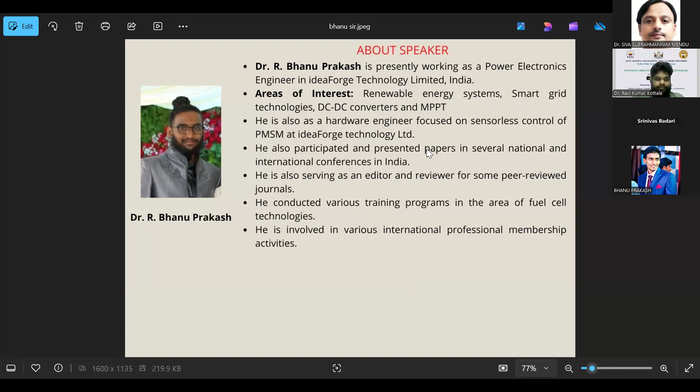Am I audible? Yes, sir, you're audible. Your video was not enabled. Turn it off because of internet issues. Okay, okay. So Dr. Siva Subrahmanyam and Dr. Ravi Kumar, thanks a lot for your brief introduction about me.

Thanks for giving me this opportunity to talk on smart grid technologies. So I'll be presenting now. I've recently changed my company, so I'm a solar PV design engineer in NewSpace Research and Technologies for aviation applications.

Let's begin with the session, Next Generation Smart Grid Technologies. The actual content we are looking at is an introduction to smart grid technologies: what is this smart grid, and what are the technologies under it, and the core technologies in the next generation that we are seeking. What are the challenges and barriers, innovations, and emerging trends coming in smart grid? What are the implementation strategies and case studies? Finally, what are the upcoming trends we still have to look after in smart grid?

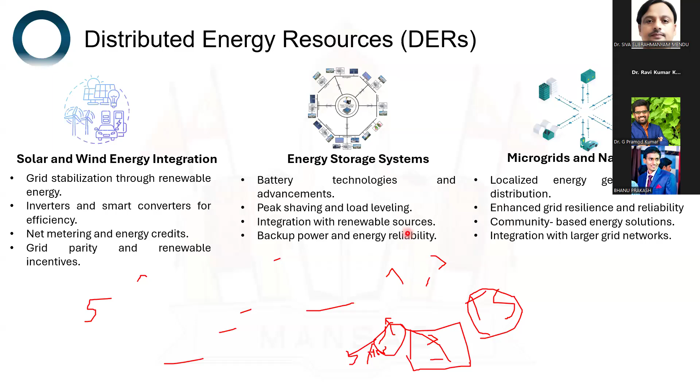An example that we use in the current industry, we generally drive the electric vehicle with the battery. But to enhance the energy production, to have a higher energy density, we're going to incorporate a solar panel system. So the load consumes 1 kilowatt, and the panel is going to give only 200 watt. It's just an example, a rough value.

Let us say I have my load like motors or turbines, whatever it is. My system is of 1 kilowatt, but my solar panel is able to generate only 200 watt. So the other power, like 800 watts remaining, is being given by the battery energy storage system. It can be battery, it can be fuel cell also. With the help of both, we can inject power to meet the actual load. These energy storage systems will help renewable energy sources like solar or wind to integrate into the system. So energy storage systems is always a key aspect here.

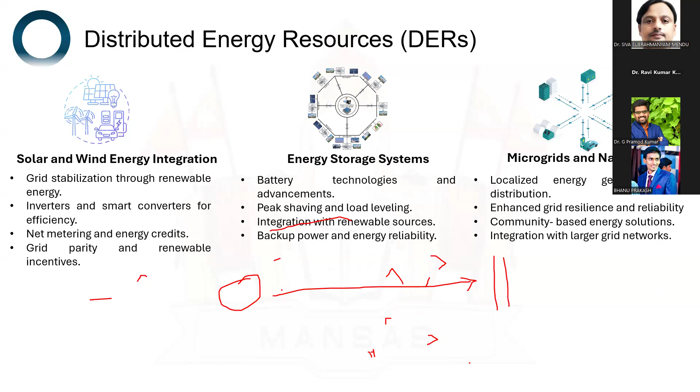Let me explain this way. You have a rural area and the transmission grid is very far, consider the gap is around 100 kilometers. This rural area may have very little power need, like 1 kilowatt, assuming they only need lights. Even for this 1 kilowatt, transmitting from here to there, the government will take time to release funds, so that is more time consuming. Before that happens, they release tenders so local entrepreneurs can come and electrify this village.

They use solar panels and wind systems so the village gets electrified with basic necessities like tube lights and fans. Slowly the government increases its transmission lines and connects to the localized system, giving extra localized power, but it's still a lossy network. Without localized energy, it's completely lossy to transmit over 100 kilometers to deliver just 1 kilowatt. But when localized power is there, if the load demand is less, it can still reduce transmission losses.

So microgrids and nanogrids are still a key aspect. Nanogrids can be considered as 1 to 10 kilowatt, and microgrids as more than that, up to around 50 kilowatt. This enables localized energy generation and distribution, and enhances grid resilience and reliability. Even when you have two power sources, if one is cut off, you can have localized power generation, and community-based energy solutions happen. These small grid networks like microgrids or nanogrids can also be integrated with the actual large power grid network.

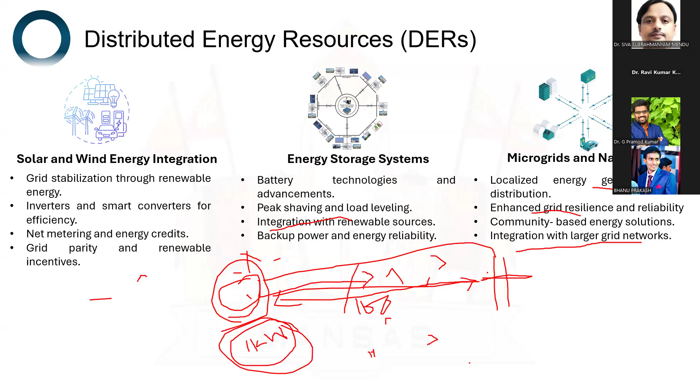The next topic is smart sensors and IoT devices. Consider real-time grid monitoring as in the previous version, it does continuous surveillance of grid parameters. At the same time, voltage and frequency monitoring are key aspects for proper synchronization, along with automated incident reporting and data-driven decision making.

What other benefits do smart sensors and IoT devices provide? Fault detection and isolation allow rapid identification of faults, along with automated isolation and rerouting. So you can isolate the fault and reroute, reducing outage durations. By easily detecting the fault, you can isolate that specific aspect, and reducing outage obviously increases reliability.

Next is predictive maintenance, where you forecast issues through condition-based maintenance schedules, based on specific conditions like power requirement and load demand. There's a specific restriction on power, and based on that condition, there's a maintenance schedule for that specific area. This is possible with smart sensors and IoT devices, along with downtime reduction through advanced analytics.

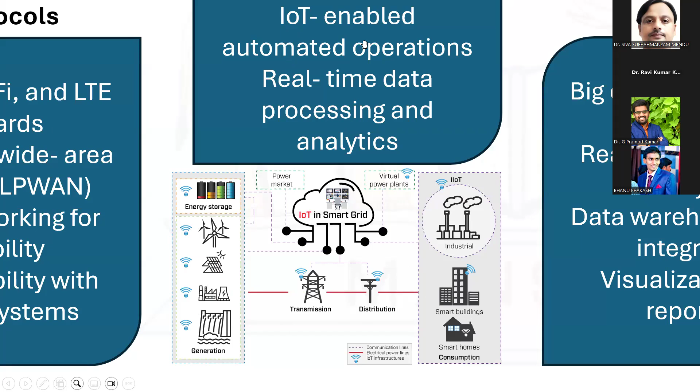If you see here, the IoT in smart grid - let us see on a broad perspective instead of a small house. So you have energy storage systems, wind, solar, and power plant - all these things, if integrated with the Internet of Things, and there exist some virtual power plants that we'll talk about later. So when all these things are being communicated, normally what happens is the power generated through the transmission line will be distributed to the buildings and industry. When it is IoT enabled, what happens to it?

It is seamless connectivity. You can simply connect the grid components, and by using edge and cloud computing architectures, you can increase the smartness of the grid for reliability and efficient transmissions.

When you have such large systems, you need communication systems that handle data management and analysis. So big data platforms are obviously required when we have hundreds, thousands, and lakhs of consumers and producers. Real time stream analytics, data warehousing and integration, visualization and reporting are all very important in data management.

When you have all this, it is important to have cybersecurity measures. Threat detection and response mechanisms is one of the key areas. You need security architecture and design principles to ensure secured transmission and communication, along with incident management and recovery, and collaboration with cybersecurity organizations.

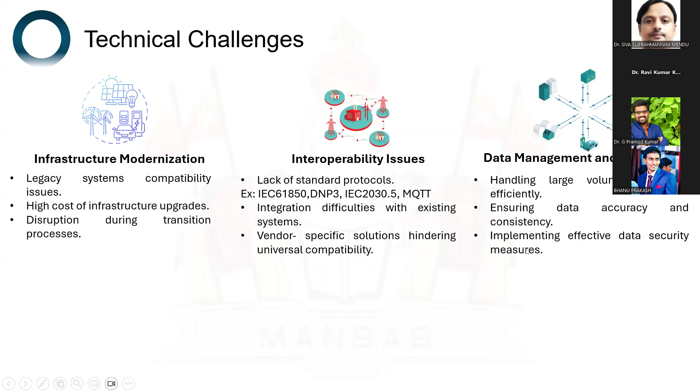Again, data management and processing means handling large volumes of data efficiently. You need data management to ensure data accuracy and consistency, whatever data we have, to make the grid smarter. And implementing effective data security measures, to ensure better security of whatever data we have.

So the other challenge is economic and financial barriers. Smart grid transformations require significant capital expenditures. You have to replace the complete system with an advanced one, and there's limited access to funding or financing options. It's very difficult to get funding, and there's uncertainty about technology lifespans. If I'm incorporating 5G technology, we don't know how far it can support. Maybe if 6G comes and it's not worth it, I won't go for it. So there's still uncertainty there.

The next one is return on investment concerns. There are lengthy payback periods, so it takes a very long time to pay back the investment. There's difficulty in quantifying benefits, you want some benefits and you have to know how much you'll get. So there's still difficulty and risk of not meeting projected returns. There's a case study I'm going to show on this risk of not meeting projected returns, and someone will give a solution for it.

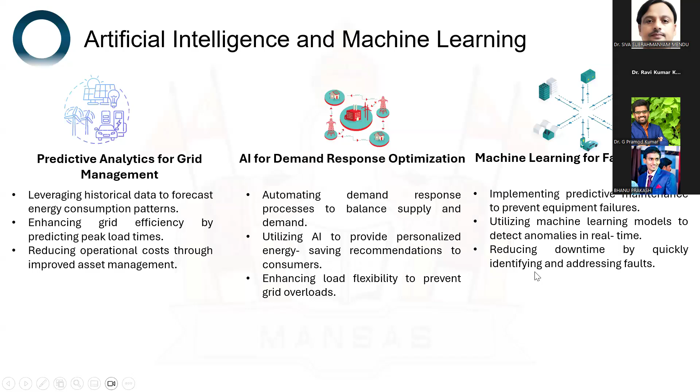Next, machine learning for fault detection, which is also trending. You train your system to identify faults, implementing predictive maintenance to prevent equipment failures. With machine learning, you can implement maintenance for equipment that isn't working well, utilizing models to detect anomalies in real time, reducing downtime by quickly identifying and addressing faults.

The next one is blockchain technology. Why do we need it? Consider decentralized energy markets - individual local generations and local power distributors working autonomously, with the grid working on its own. The power grid has given some controls to local groups to decentralize, so they can take their own decisions for power generation or consumption.

When the system is decentralized with more owners in the system, you need technology to ensure proper communication for enhancing grid stability, facilitating direct energy sales between consumers and producers. This blockchain technology supports cases like solar power generation in Andhra Pradesh and power consumption in Delhi - direct energy sales become possible with blockchain technology.

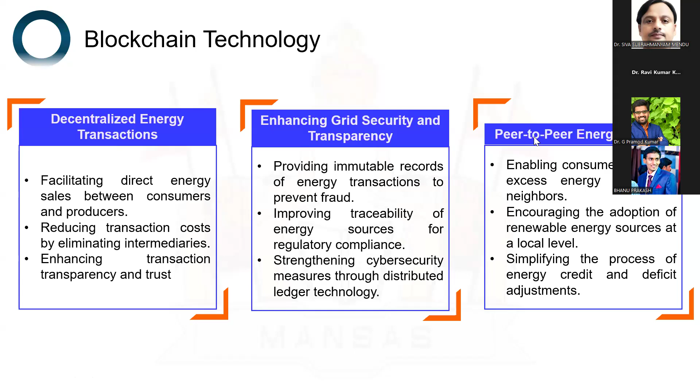Like if you see, you're going to sell a Bitcoin and another person is going to buy a Bitcoin. So you two are independent entities - there is no main person involved. So it is like peer-to-peer, person to person, you can consider that. This is possible with the help of blockchain technology.

And what is this blockchain technology? It has two things - block header, block body, and again another block header, block body - connected with the help of hash. Hash is something like, you can see bubble sorting algorithms using for loops, but hash technology is like in just one iteration you'll get the solution. You will identify the required element, or you will sort the things and identify the required element. So this is called hash. If you are a programmer, you will get to know this. So there are two block headers, two block systems, and you're going to chain them with the help of this format of technologies, algorithms, or architecture.

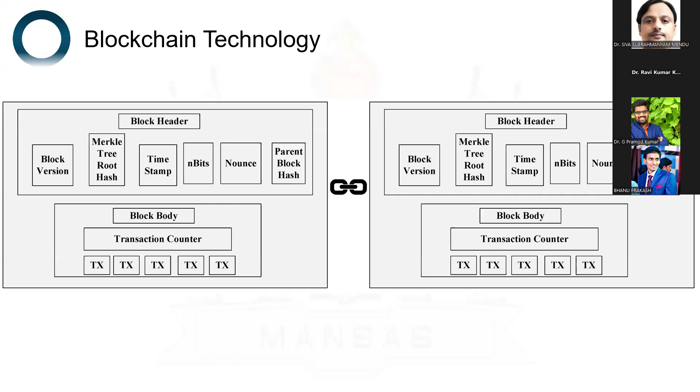So if I adopt this blockchain technology, you can see its characteristics - it's programmable, whatever things you want, you can evaluate. So you can say this amount of price you can give - that level of programming can be adopted in blockchain technology.

You can decentralize it - like the local distributor can actually completely work with its consumers - and it's immutable, so validated transactions cannot be reversed. Once it is done, it is done. So you can't say 'I have consumed only this much power' - no. The transactions cannot be reversed, and this actually reduces ambiguity.

And the transactions are timestamped. There's consensus - the nodes have to give consent to validate a transaction. So there might be a mediator who has to give consent to do a transaction, but still such provision is possible when you incorporate blockchain technology, and it is anonymous - the identity of nodes is really not known, so from where you are getting this power is not necessary to know, and it is very secure.

And recently, though blockchain technology is very secure, there has been a data breach in terms of cryptocurrencies - you can see that WazirX has filed everything, like a lot of money theft has happened, but still the blockchain technology is very robust. It is still a secured system.

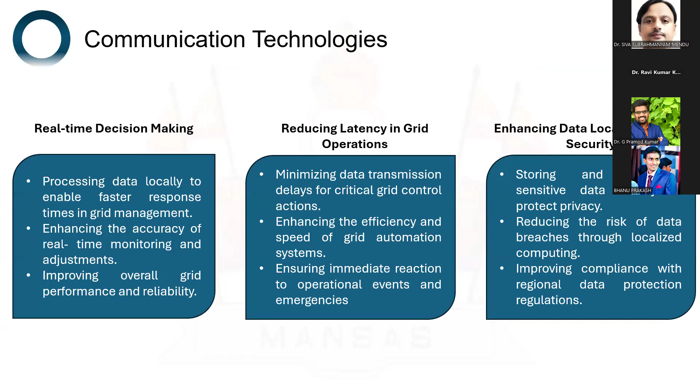So again, the communication technologies enable real-time decision making, reducing latency in grid operations, and enhancing data localization security. These are all what I call the amenities of communication technologies.

And advanced energy storage solutions - I'll go a bit faster since time is less. Next generation battery technologies - I'm going to show what is the current technology and what will come up with next generation battery technologies, and integration of renewables is again part of advanced energy storage solutions.

So grid stabilization - when I can have my own power, everyone can have their own autonomous power, it is really hard for the grid to stabilize this. But still you can provide better energy storage. When you have extra power, you can still have better reliability over this, so resilience can be improved.

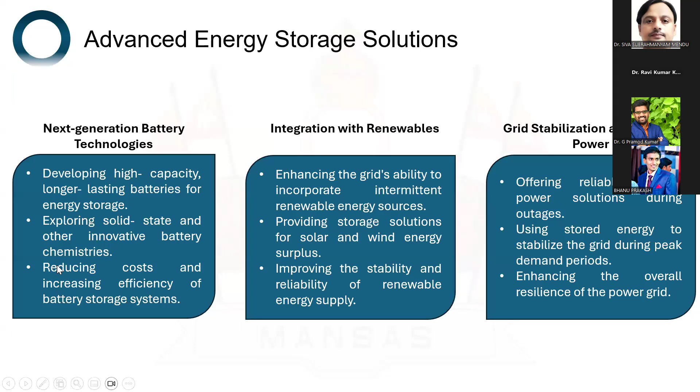So as I said, there are different types of batteries we have, like lithium ion, lithium polymer or lithium iron phosphate, lead acid. These lithium ion batteries are used because of their high energy density, which is why they're adopted in aviation applications or wherever weight plays a very key role.

Now solid state batteries are coming up. Compared to lithium ion, solid state batteries have an advantage because lithium ion has a liquid inside it. Cylindrical lithium ion batteries are very dangerous, they can blast frequently. But with solid state, this risk can be reduced if you incorporate lithium ion with solid state.

But solid state is not yet a completely evolved technology, it's an emerging technology. Nickel cadmium and others all have different characteristics, but because of lithium ion's higher energy density and life cycle characteristics, they are adopting it. An alternative for lithium ion is lithium polymer. Lead acid, because of weight constraints, is mainly used for households, so most households adopt lead acid.

Hello, yeah. So Ravi sir, a small thing - at 7:30 there is another small session going to start. Okay, can you quickly summarize that one, sir? Yeah sure, thank you sir.

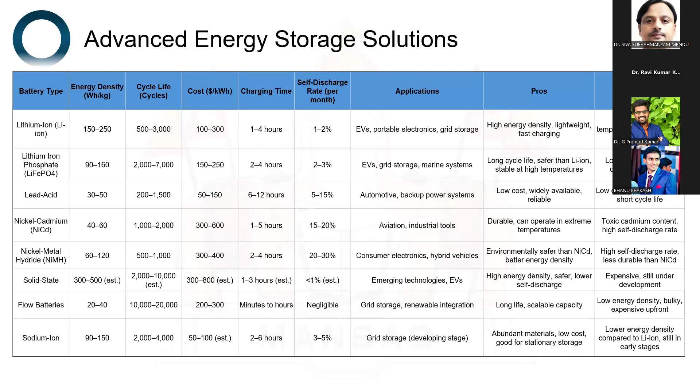So that is the next generation battery technologies. If you see the case studies and their implementation strategies, one way is, instead of the radial system, you can go for a ring main system to enhance reliability. This is one of the systems.

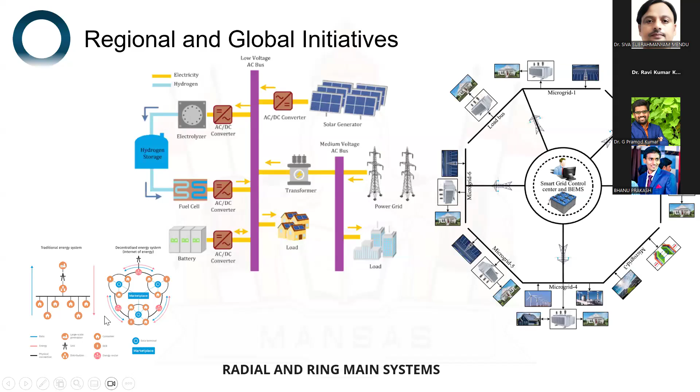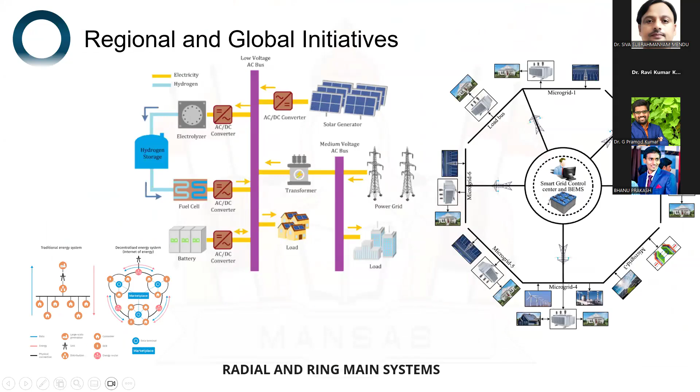But battery energy management systems have been adopted to increase reliability. So here it is a radial system and this is a ring main system. Again, everything was decentralized - they have their own setup and you need a marketplace for it, so all these things come into picture. Replacing this increases the complexity because you don't know a specific node for it, so it increases complexity, but it also increases reliability of the system.

So as I said, there is a peer-to-peer operator where I'm the consumer, I'm the prosumer - I can produce and consume as well. For all these renewables, I have solar panels, someone else has wind, so I will forecast these details and create a grid price for it.

Now electric vehicles are also coming into the system. What is the initial state of charge? I'll consider that my battery is fully charged, and I'm going to give this much rate for this. Accordingly, there will be a bid or offer given by these people, and based on renewable energy generation, they give an optimized price.

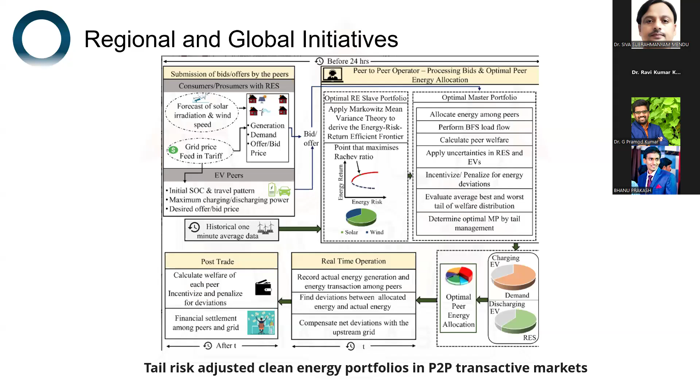As I said earlier, there is a factor that you need to identify - this much risk will be there on the grid. By considering these factors, you can integrate the power, or do peer-to-peer energy trading. That's something like post trading, it's a big concept, so you can refer to this video at a later stage to understand it.

And again, everything has its own regional standards - North America has its own standards, Asia has its own standards, Europe has its own standards. So it's a bit of a mess, figuring out which standard to follow for better ensuring faster development.

If you consider smart cities, there are currently evolved smart cities like Songdo, South Korea. What makes it smart? It is a fully integrated smart grid system, with smart meters, energy storage systems, and real-time monitoring systems. These are the things it has adopted, and it calls its system a smart grid.

Abu Dhabi has involved renewable energy sources, energy storage systems, and good demand side management systems - it's a different entity but still calls itself a smart city. Denmark has smart meters, electric vehicle charging stations, and energy storage systems, and having incorporated this, they call themselves a smart city.

If you see utility-led innovations, USA's California and Ontario, Canada have adopted advanced metering infrastructure - every house has an advanced metering system. But in public-private partnerships, India is in the prototype stage - it's accelerating smart grid solutions but hasn't yet fully evolved. Ontario, Canada has deployed smart grid technologies by adopting advanced data management systems.

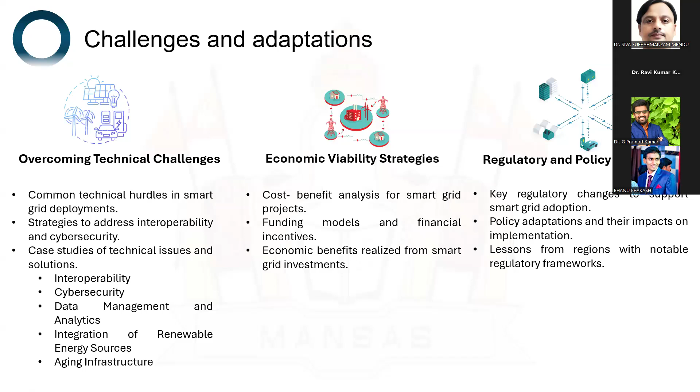And what are the upcoming trends? A very simple format, I can say. Quantum computing is one alternative which is least explored by the industries, and if it evolves with the researchers, then we'll incorporate that in the industry, but a product or a service has to come out with that.

Even now the system has to integrate 5G networks, which is the latest network, for faster and more reliable communications. The next one is evolution of automated systems - every system should be automated. That can be done with the help of AI and machine learning systems for predictive maintenance.

So if you see the future regulatory policy and market evolution technologies - future regulatory frameworks, there have to be proper guidelines. And if you consider economic incentives, tax incentives and subsidies for renewable energy adoption - whatever we have, we still need a bit more for better encouragement of smart grid adoption.

And international cooperation standards - there is no harmony, everyone has their own standards. The European Union has their own standard, America has their own standard, India has their own standard. So there is no harmony in universal standards. There has to be some standards, and by collaborating we can make the grid and evolve this market even better.

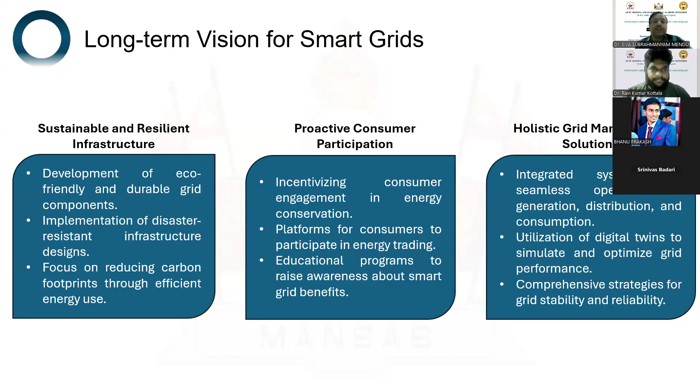Thank you, thank you all. Dr. Prakash Garu, on behalf of MVGR College of Engineering and the participants, I would like to extend my heartfelt gratitude to you for an engaging and insightful session on next generation smart grid technologies. The advancements in this domain, as discussed today, are not just shaping the future of energy management, but are also pivotal for achieving sustainability goals globally. Thank you once again, sir, for your valuable time and contribution to this session. Thank you so much.

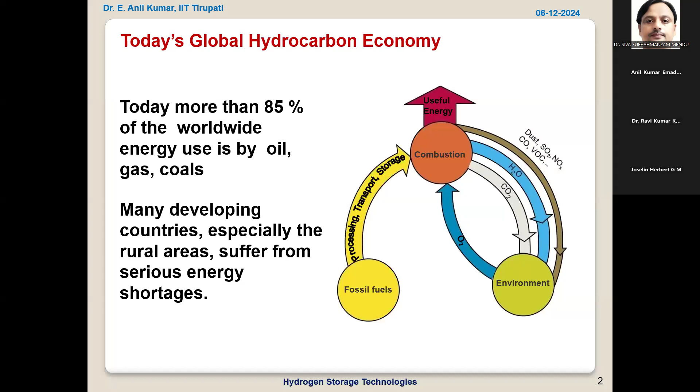We'll see how it is. If you see with respect to the transportation sector, this is one factor which is worrying mostly in cities, because air quality is decided by transportation. One of the major factors - maybe 32 to 40% of the pollutants in cities - is coming at least from the transportation sector.

So in cities, as the population of automobiles increases, that is posing more pollution problems also, in two ways. The energy bill is very high, because we are mostly importing these petroleum products. The second thing is the living standards, the air quality in the cities is in danger because of the use of fossil fuels, especially for transportation applications.

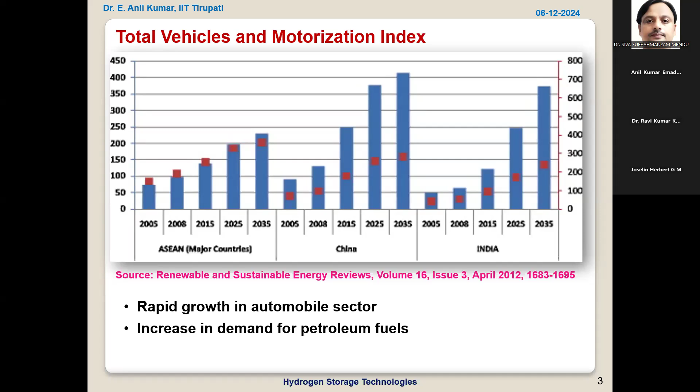So if you see what are the different alternatives to mitigate the petroleum requirements, or petrol, diesel, or natural gas requirements, these are some of the possible options: increasing the efficiency of the conventional fuel systems. This has been happening for the last 150 years, right from the invention of the Otto cycle, diesel cycle, or even gas turbine cycle.

A lot of engineering effort has gone into increasing their efficiency, and we know that the maximum efficiency of any heat engine is given by the Carnot engine, which says 1 minus heat sink temperature divided by heat source temperature. So there are efforts to come nearer to this by using a higher temperature where these engines are operated. But using higher temperatures is always associated with thermal stress problems for the materials.

The materials should be able to withstand higher temperatures for longer durations. Not only that, thermodynamically as well as heat and mass transfer wise, all these devices are optimized to come nearer to the thermodynamically possible limit. But nevertheless, that gap is still huge, because if you take a combined power generation cycle, which has an efficiency of around 40-45,

whereas the Carnot efficiencies for the temperatures at which they are operated ranges from 60 to 70. So there is still scope to increase the efficiency of the conventional system, but we are almost reaching a kind of practical saturation point. The thermodynamical saturation point is something different, which is a higher benchmark, but we are almost reaching a practical saturation point because the increase in efficiencies, whatever we do, is very small, very minimal.

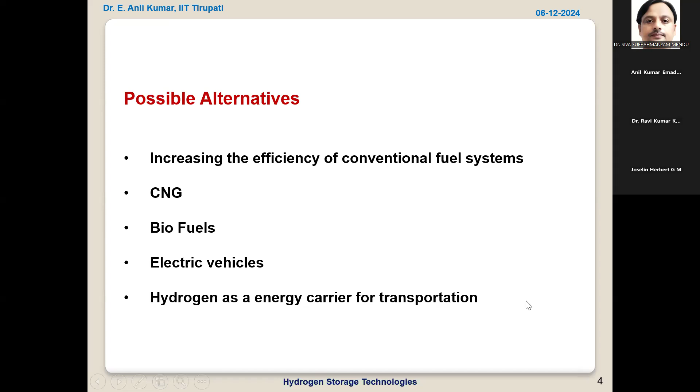So there is a little bit of advantage with respect to hydrogen vehicles, though battery vehicle technology is much more advanced compared to hydrogen fuel cell based vehicles. In this talk, we will see the challenges to make it more efficient, or how to bring them into the market, make it more commercialized or price competitive, when compared to petrol or diesel based vehicles, when it comes to hydrogen and fuel cell based vehicles.

So why hydrogen? Any fuel is majorly a mixture of carbon and hydrogen. As we move from fuels which are purely carbon, mostly coal, which is solid, and as the number of hydrogen atoms in the molecule increases, it becomes slightly lighter, so it becomes oil first. When hydrogen atoms further increase within the molecule, it becomes a gas, further lighter, it becomes natural gas.

When there is no carbon atom in the molecule, it is pure hydrogen. So as we move from molecules of higher carbon to molecules of lesser carbon, the calorific value or heating value of the fuel increases, and the pollution reduces. These are the advantages. If you have pure hydrogen, when we are using it for energy, harnessing the energy from hydrogen, we can say it is environmentally friendly. But here again, the catch is the hydrogen should be obtained in an environmentally friendly way without polluting the environment. So when we have pure hydrogen, it is eco-friendly.

It is having higher energy per unit mass because, as I told, the calorific value increases when you oxidize carbon and hydrogen. The energy released when you oxidize hydrogen is much higher compared to carbon. So because of that, per unit mass, hydrogen has higher energy density. And of course, hydrogen is abundant, not as a free element, and it is mixed with either oxygen in water or with carbon in all organic compounds.

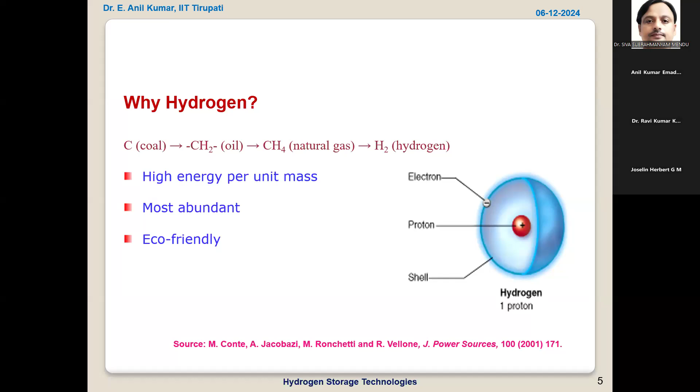So if we compare the thermodynamic properties with the other fuels, the heating value, as I told, the amount of energy that releases when we burn 1 kg of fuel, it is almost thrice that of petrol. So that's why it has higher energy density per unit mass, and it has a longer air fuel ratio. Ignition takes place over a longer air fuel ratio.

The major challenge is also with the diffusion coefficients of hydrogen in air. Since it is the lightest element, it can diffuse very fast, and it is odorless and colorless. So it is very difficult to realize that hydrogen is leaking. There are no odorants which can diffuse at the same rate as hydrogen. So hydrogen leakage detection is a major challenge. Of course, nowadays we have good sensors. If there is a hydrogen leak, the sensor gives a warning that there is a leak, or that the hydrogen concentration in the environment is increasing drastically. So as a fuel, it has good characteristics because it has higher energy density per unit mass.

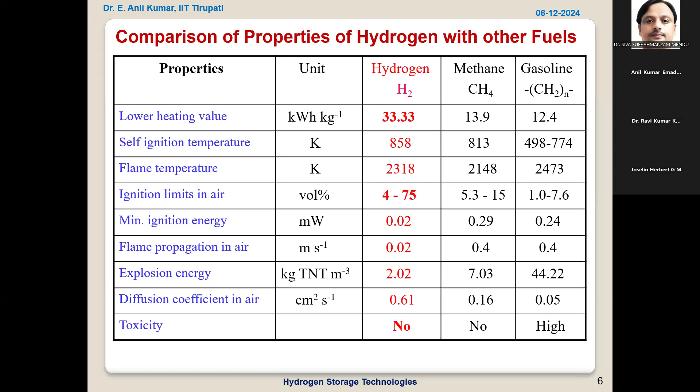But what are the challenges to realize hydrogen as an energy carrier for different applications? One is producing hydrogen in an environmentally friendly way, in a cost effective and efficient way. We'll see briefly what are the different production methods, what are the challenges associated with hydrogen production, and what are the research opportunities available.

Of course, utilization. We can use it by burning in IC engines or fuel cells. A lot of work is being done at ARAI Pune to use hydrogen directly in internal combustion engines. The second option is fuel cells, which directly convert the chemical energy present in hydrogen into electrical energy. Fuel cells are more efficient compared to IC engines. But if you see cost wise and durability wise, IC engines may become the winner. At present, fuel cells are looking like a better option because of the higher efficiency of energy conversion.

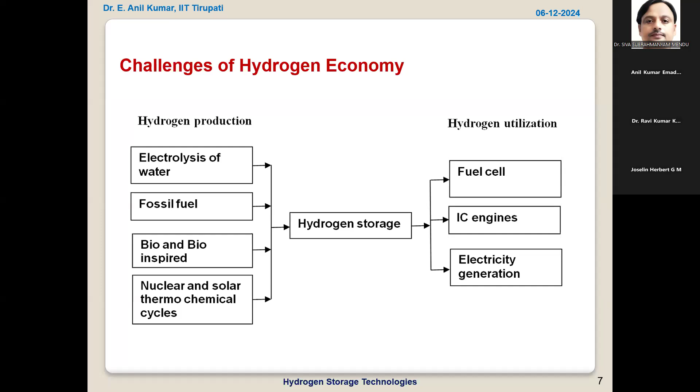So we'll see very briefly about hydrogen production. We'll concentrate mostly on hydrogen storage, especially for transportation or stationary applications. These are the present technologies available for hydrogen production. This is a very brief note only about hydrogen production. There are many methods for hydrogen production, but as on today, about 50%, half of the hydrogen produced is from steam reforming.

It is a two-step reaction. We convert natural gas into carbon monoxide and hydrogen. Then the carbon monoxide undergoes a water shift reaction, giving carbon dioxide as well as hydrogen. So most of the hydrogen, 50%, is produced by this method. The problem is we are still using fossil fuels and releasing carbon dioxide. But this is the cheapest way to produce hydrogen, much cheaper than other available hydrogen production methods.

Then partial oxidation of heavy hydrocarbons is a similar process, as is partial oxidation of coal. This is a very good method for the Indian context because Indian coal has more ash content and sulfur content, so we are not able to use it directly for burning, and we still import coal for those reasons. But if we can gasify this coal in situ near the coal mines and convert it into a useful gaseous fuel like hydrogen, then it becomes cleaner.

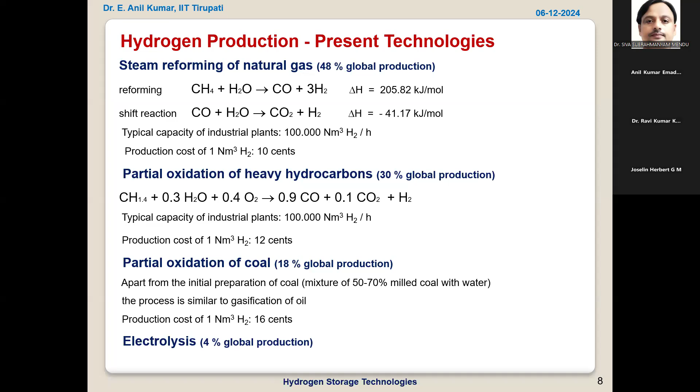From these present day technologies, we should be able to move towards future technologies where we use biomass, solar and wind using the electrolysis process. Biomass also has a lot of research going on through gasification methods or biohydrogen production through algae. And of course nuclear has its own advantages and disadvantages, because you can produce electrical energy from nuclear energy.

Again, it is kind of a question mark, how safe it is environmentally, how to deal with the nuclear waste, all those things. So I see the opportunity is there with respect to having larger solar plants or wind plants and producing green hydrogen from it. Maybe that's one of the future options to move towards cleaner fuels for transportation applications.

So with respect to production, yes, there are many research opportunities. One is developing higher capacity electrolyzers, and producing hydrogen in a cleaner way through the biomass route, and integrating these electrolyzers with solar and wind farms.

If you are able to produce green hydrogen in an environmentally friendly and cost-effective way, the cost should be comparable with present fuels like petrol or diesel. It should be, otherwise everything depends upon the cost. If it is too high, people won't be ready to buy it immediately.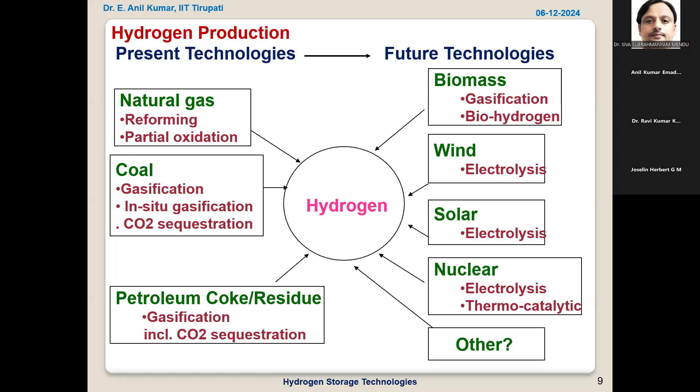One method of storing hydrogen is compressing it to very high pressure, maybe 300 to 800 times atmospheric pressure, about 30 to 80 megapascal. If you are able to store at that pressure, you can run a four-wheeler with a single charging, covering about 400 miles, or 600 to 700 kilometers.

The challenge with compression of hydrogen is we have to compress to very high pressures, so we require a lot of energy. Where is this energy coming from? If you are using mechanical compressors, you need electrical energy to drive that mechanical energy and compress the hydrogen from the electrolysis output to such a high pressure where we can store it in gas cylinders. It requires a lot of mechanical or electrical energy.

If you look at the energy content, compression takes up almost 25%, one-fourth, of the hydrogen energy which we can obtain through fuel cells. By using fuel cells we produce energy, converting it into mechanical and then electrical energy directly. So to compress hydrogen requires one-fourth of the hydrogen energy present in the cylinder - such a high amount of energy is required.

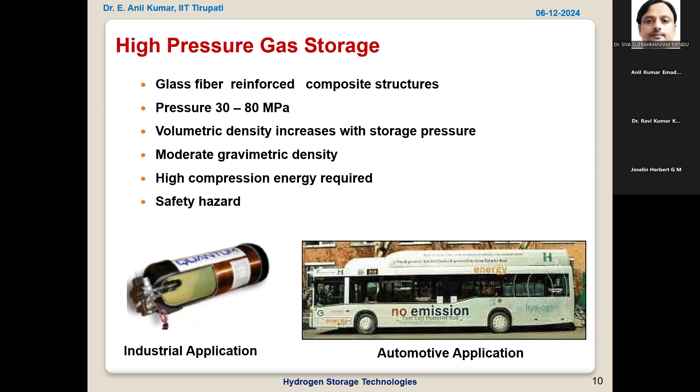So compression is one way of storing hydrogen, increasing volumetric energy density by compressing the gas to high pressures. The other method is liquefying it. If we can liquefy the gas, its density further increases. Of course, liquefaction means at atmospheric pressure we have to take hydrogen down to 20 Kelvin, which is about minus 253 degrees centigrade - such a low temperature requiring cryogenic facilities.

Either we should be able to use cascading vapor compression refrigeration systems, or mixed refrigerant cryo coolers using Joule Thomson expansion. These methods can be used, but they are also highly energy intensive, because to liquefy the gas we have to compress it to very high pressures, then expand it to liquefy the hydrogen.

Liquefied hydrogen has to be stored at 20 Kelvin, a much lower temperature. Suppose you have a liquid hydrogen tank at 20 Kelvin, whereas the outside temperature is room temperature, around 300 Kelvin. So there's about 280 Kelvin temperature difference between the inside hydrogen environment and the atmosphere outside. So there will always be heat loss into the tank, and some hydrogen transforms into vapor.

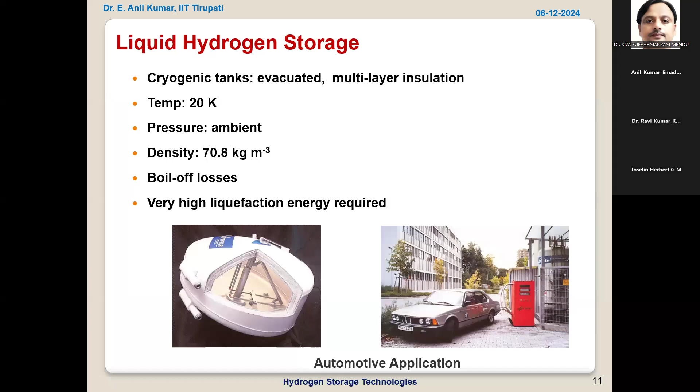Then the third option for storing hydrogen is solid state storage of hydrogen. There are materials which adsorb as well as absorb hydrogen into them. Adsorption is a physical phenomena where the gas just goes and sits over the surface of the molecule. Whereas absorption is a volumetric phenomena, because the gas goes and sits in the interstitial space.

Examples of adsorption based materials are all carbon based materials like activated carbons, graphene, graphite, single wall carbon nanotubes, multi wall carbon nanotubes, because they are porous and have larger surface area. They are able to attract hydrogen and it just sticks as a molecule on the surface of the solid material. In absorption, the hydrogen splits into atoms.

That atom goes and sits in the interstitial space of the molecule. Examples are metal hydrides and complex metal hydrides. In metal hydrides, hydrogen forms a single bond. In complex metal hydrides, hydrogen forms a complex bond, more than one bond.

We are going to discuss more about metal hydrides in this talk, because they are proven to be cyclable, reversible, and stable for a few thousand cycles. Whereas complex metal hydrides are not as reversible. If you take, for example, alanates and borates, they release a good amount of hydrogen gravimetrically. If you take 100 kgs of material, they can store up to 10% hydrogen in that. But they are not as easy to regenerate.

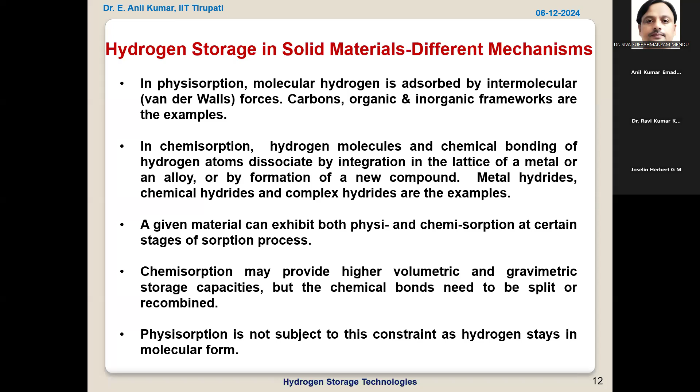If you take metal hydrides, as I told, they are reversible. They absorb and release hydrogen reversibly for a few thousand cycles. That's why they found applications, because they can be used repeatedly for a few thousand cycles. So they have a lifetime, and can be used for a few years once we start putting them in use.

So these metal hydrides are of three types. Generally we can characterize them based on the temperature at which they absorb and release hydrogen. If they release hydrogen below 50 degrees centigrade, we call them low temperature metal hydrides, because they can readily release hydrogen at near atmospheric conditions. Or we may need to increase their temperature between 100 and 300 degrees centigrade, so they are called medium temperature hydrides. And some hydrides only release hydrogen at very high temperatures, more than 300 to 350 degrees centigrade, like magnesium. These are called high temperature applications.

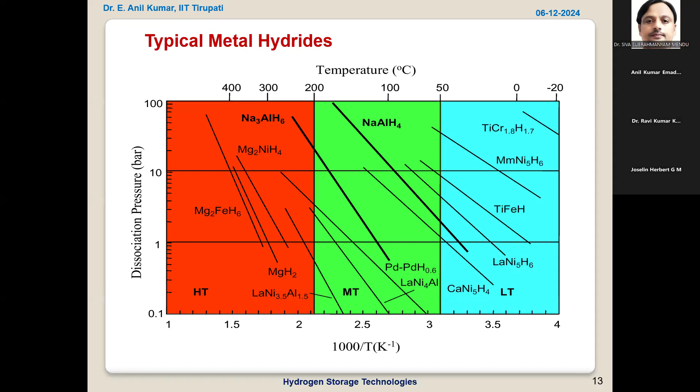Each has certain applications. Suppose for hydrogen for mobile applications, you generally look for materials which can store readily at near atmospheric conditions, because you don't want to use high temperatures for their absorption and desorption purpose. So the tanks look like this.

It is a kind of shell and tube heat exchanger, which can be staggered into a unit. So those can be used along with the cars.

So if you compare the three methods of hydrogen storage, the first one we discussed is compressed hydrogen storage, the second is liquefied hydrogen storage, and the third is solid state hydrogen storage. All three have their own advantages and disadvantages.

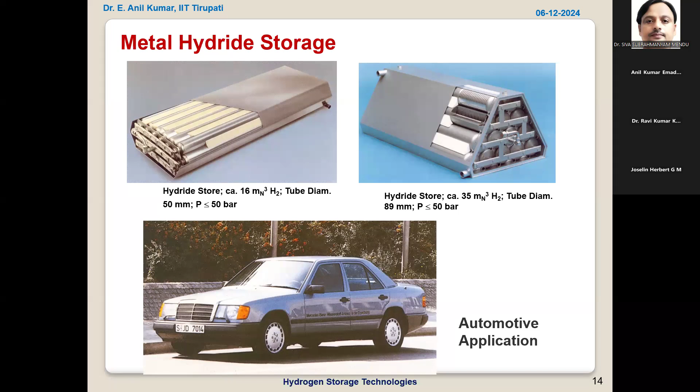Liquid hydrogen, and then gaseous hydrogen, solid state storage of hydrogen in room temperature materials, which has lesser gravimetric hydrogen storage capacity. That means if you take lanthanum nickel 5, it only stores 2% of hydrogen per unit weight. If you take 100 kgs of lanthanum nickel 5, it can store only 2 kgs of hydrogen.

Whereas if you take magnesium based hydrides, but they operate at high temperatures, they can store up to 6 to 7% of weight. That means if you take 100 kgs of material, it can take 6 kgs of hydrogen. So the volume reduces per unit mass. If you can store more amount of hydrogen, of course the volume reduces.

So as we see, the volume will be lesser in case of the solid state. But the challenge associated with solid state hydrogen storage is the gravimetric density, because they will become heavier. Because they can store less amount of hydrogen per unit mass in solid state metal hydrides, they require a lot of weight for storing the same amount of hydrogen.

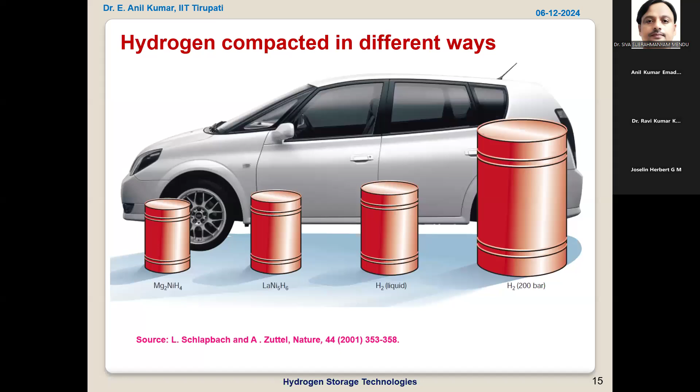But nevertheless, these materials, metal hydrides, find many stationary applications for hydrogen storage. We'll see some of the stationary applications. I'm going to highlight three types of stationary applications.

So before going into how these metal hydrides are used for storing hydrogen for stationary applications, let us see a brief chemistry about the hydrogen absorption and desorption of metal hydrides.

So if you take a metal matrix, it is commonly a metallic, intermetallic, or an alloy - it shows the solid matrix. So when you send hydrogen over this solid matrix, initially it sticks over the surface. When the pressure increases over the surface at a certain pressure, the hydrogen gets dissociated into atoms that go and sit into the interstitial space of the solid matrix.

Because if you take any solid, we have molecules made up of a lattice. We know different lattice structures like face-centered cubic or hexagonal close-packed structures. So atoms are arranged in a particular fashion and there is a gap between the atoms. So this hydrogen goes and sits in between the atoms, within that lattice structure, in the gap between the atoms. Once the hydrogen atoms get filled into the lattice, again the hydrogen starts filling over the surface.

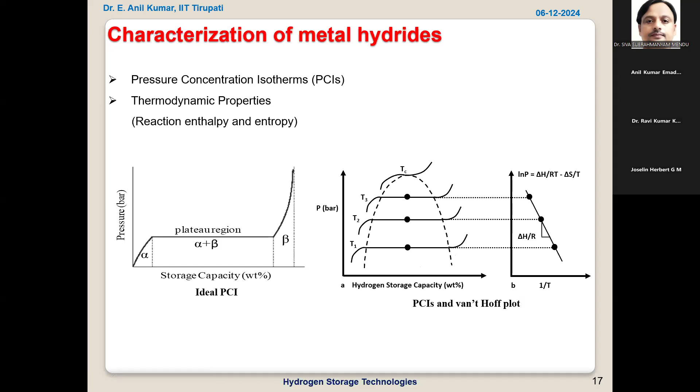Let us see with an example how we can use this knowledge of the dependency of metal hydride formation on pressure and temperature. Of course, the two are dependent variables - once you fix the pressure, the temperature at which formation takes place is fixed, or once you fix the temperature, the pressure is fixed. So if you see, these are the isotherms drawn.

So what we do is take metal hydride in a reactor and keep it at room temperature or lower, initially by circulating a fluid through the bed. Of course the fluid and metal hydride won't be directly in contact; there will be a shell and tube arrangement where the shell side has the metal hydride and the tube side has the fluid being circulated. The fluid is circulated at a lower temperature, maybe room or atmospheric temperature, so the metal hydride formation happens at a lower pressure.

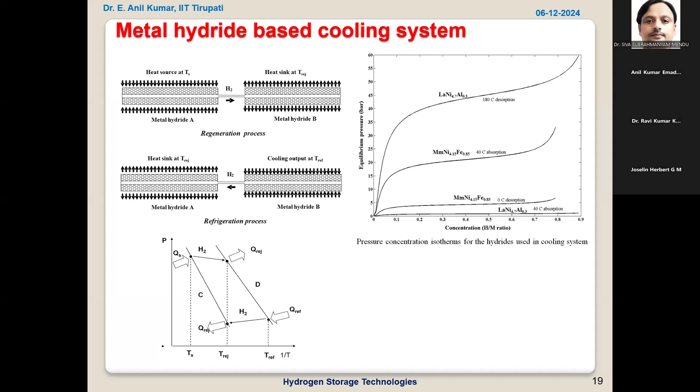So we need one high pressure alloy here. In this example, mish metal nickel 4.15 iron 0.85 is a high pressure alloy, whereas the lanthanum based hydride is a low pressure alloy. So using one high pressure alloy and one low pressure alloy, we can construct a closed loop thermodynamic cycle where we can continuously transform the heat energy into a refrigeration effect.

So we have taken lanthanum nickel, LaNi5, which generally has a plateau pressure of 2 to 3 bar. You can substitute other rare earth elements for lanthanum, or aluminum, manganese, cobalt kind of elements for nickel, and alter their plateau pressures. For example, in this case we substituted cerium for lanthanum, so that the plateau pressure - the pressure at which it absorbs hydrogen - has increased with substitution of cerium, so it becomes a high pressure alloy. When I substitute aluminum for nickel, it becomes a low pressure alloy, meaning it can absorb and desorb hydrogen at a low pressure.

So I'm able to produce one pair of high pressure alloys and one pair of low pressure alloys. Of course, this is not an easy process to obtain these intermetallics or alloys, because all the elements have different melting points. If you take lanthanum, nickel, aluminum - lanthanum has a melting point of about 800 to 900 degrees centigrade, depending upon the source. Nickel has maybe around 1400, and aluminum has 600 degrees centigrade. It's very difficult to produce these intermetallics, so you require special melting knowledge to obtain them.

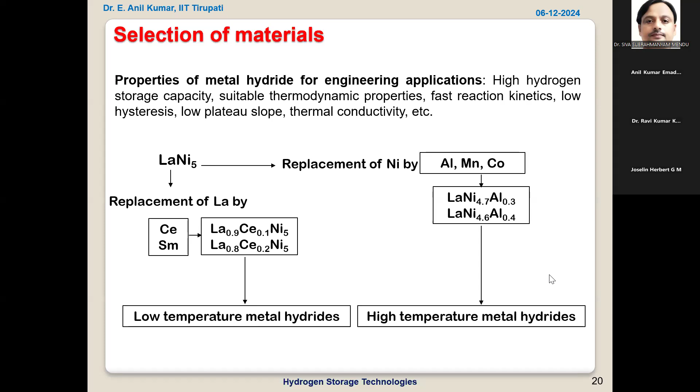So once you have the intermetallics, you need to test the pressure concentration isotherms to see whether you are getting the required properties or not. So we have developed a setup indigenously called the Sieverts apparatus to measure the isotherms. To measure the isotherms, the material is taken in a reactor kept at a constant temperature. This is initially evacuated, so there is no hydrogen. Then hydrogen is supplied to this material in steps from a known, calibrated volume - in the first step, it is supplied from vacuum to maybe 1 bar, so that hydrogen gets absorbed, and we can quantify the amount of hydrogen absorbed using the mass balance.

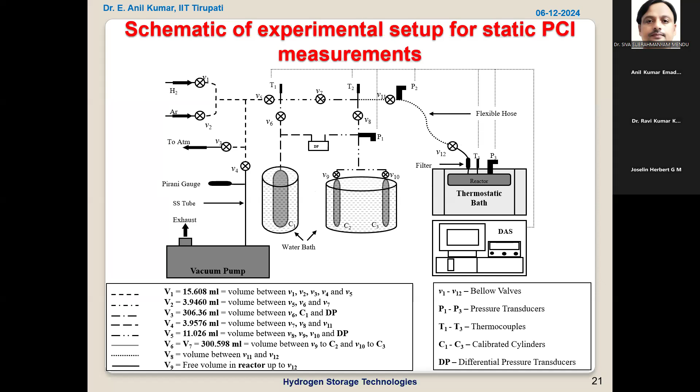So we'll get 1 point at a constant temperature. Then we step up the pressure and get the second point. Like that, we can plot a series of points and get isotherms like this. Theoretically this should be flat, but because of inhomogeneity in the materials, the plateau shows a little bit of slope.

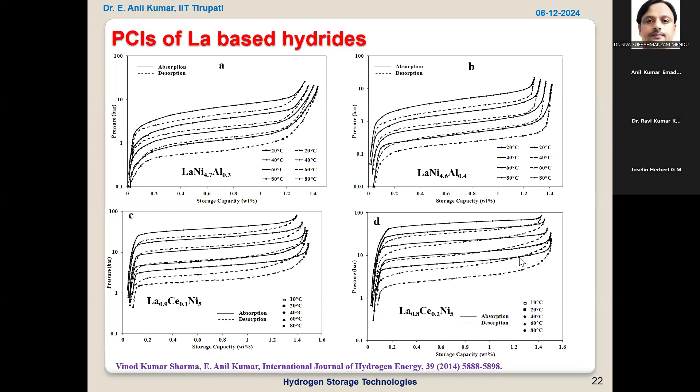So we have measured the isotherms of 2 cerium-based hydrides and 2 aluminum-based hydrides. Basically, aluminum-based hydrides are low-pressure hydrides, and cerium-based hydrides are high-pressure hydrides. So we make a combination of 1 low pressure and 1 high pressure. We can make 4 combinations.

These work in a closed loop, as I told, with the temperature swing, the hydrogen being transformed between the 2 beds, and simultaneously we can use the heat energy to produce the cooling effect. We have tested it at 25 degrees centigrade heat rejection, 140 degrees heat supply, and 10 degrees for the refrigeration effect, which can be used for air conditioning applications.

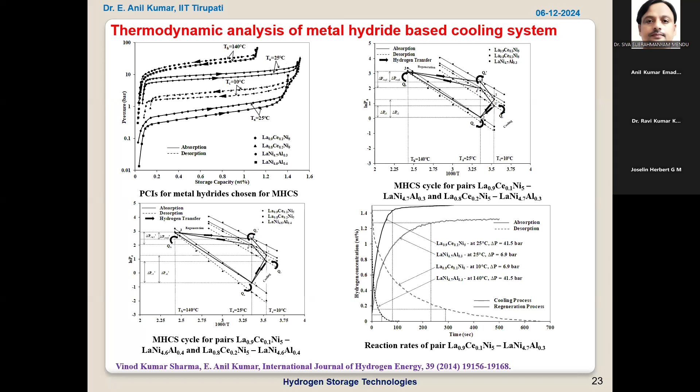So we have tested all the 4 alloys, and thermodynamically we have seen that we can obtain a COP of 0.8, which is comparable with the lithium bromide water systems theoretically, but it is only a kind of thermodynamic limit. If you take actual heat and mass transfer, which involves a lot of irreversibilities, the performance may come up to 50% of that.

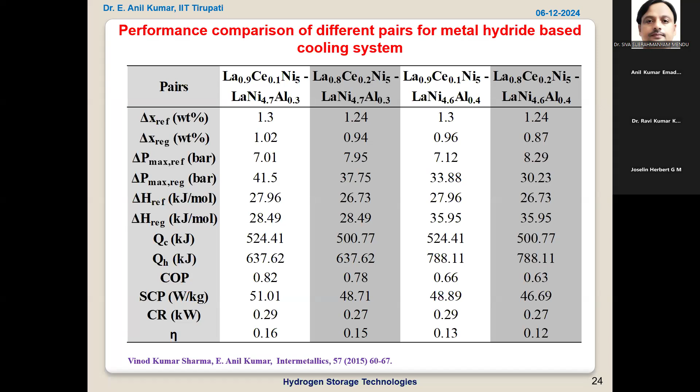Maybe we can obtain 0.4, 0.5 COP with these metal hydrides, but the advantage with these systems is you can go to very low temperatures, you can obtain very instantaneous cooling, fast blast cooling. You can obtain -50, -60 also very fast, which is very necessary for food processing applications. And a variety of energy source temperatures can be used.

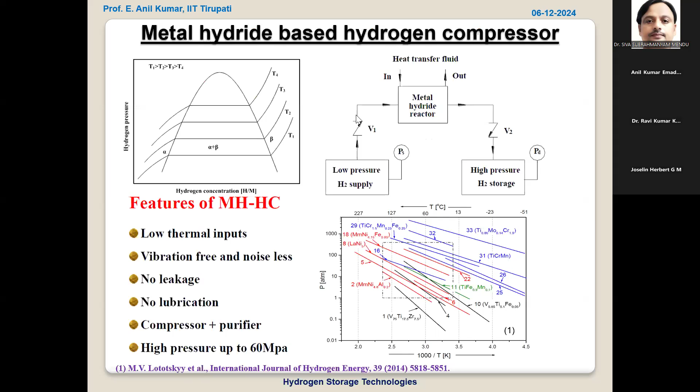As I told, metal hydride compressor also, we have tested a kind of metal hydride compressor. We have built a metal hydride reactor and tested using cerium based hydrides. Earlier we showed the cerium based hydride - theoretically you can absorb at 20 degrees centigrade, absorb hydrogen at 5 bar. When you heat the bed to 80 degrees centigrade, you can desorb hydrogen at 40 bar. You can obtain a pressure ratio of 8 just by using heating water at 80 degrees centigrade.

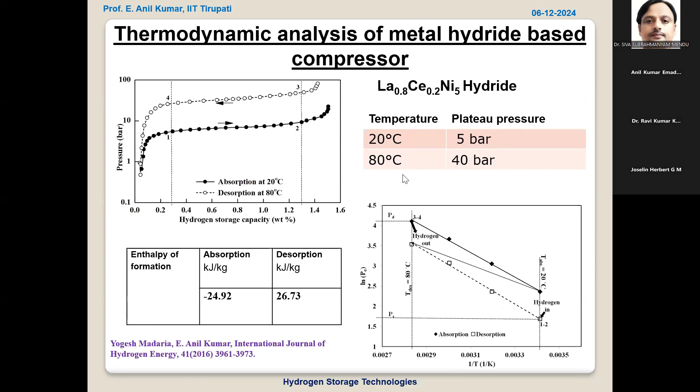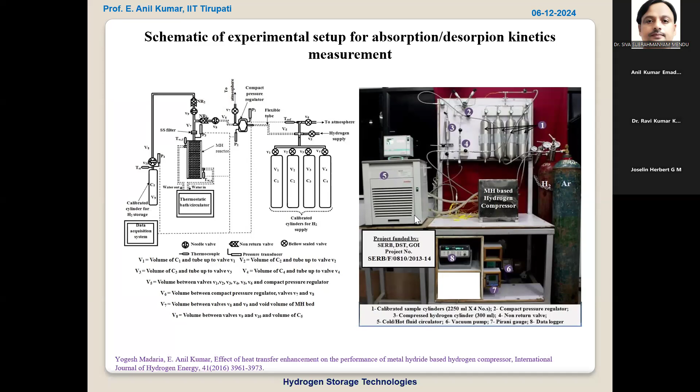So we supplied water at room temperature initially and absorbed hydrogen in this metal hydride bed, shown here. Centrally the water is supplied at the periphery, metal hydride occupies this, and hydrogen is supplied centrally. Metal hydride absorbs hydrogen from these cylinders. While desorbing, we desorb into another cylinder at high pressure. So we can get hydrogen from low pressure to high pressure by operating through metal hydride using thermal energy. This shows the reactor that was used for the hydrogen compression studies.

So we have studied 3 types of beds for hydrogen compression. One is powder bed, because in powder bed the particles are loosely packed, and heat transfer is not that good because of the lower effective thermal conductivity of the metal hydride bed. To increase the heat transfer characteristics, we have made some pellets. We made 2 types: one by mixing the metal hydride and graphite powder, which has higher thermal conductivity, so when compacted the conductivity becomes more, but there's a problem with diffusivity. If you use higher pressures, the compact becomes very tough, and the initial diffusion may get affected because hydrogen has to diffuse through the solid particles.

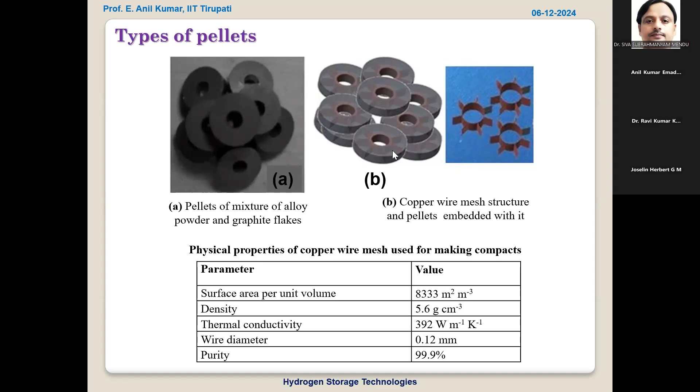We also used copper mesh - porous copper wires and plates made into mesh kind of fins to enhance the thermal conductivity. So we have tested the hydrogen desorption rates for these 3 beds, because the hydrogen absorption and desorption rates decide the cycle time, how fast you can do the compression process. If the hydrogen absorption and desorption is faster, then you can obtain compressed hydrogen in less time.

Okay, so the compacting has definitely increased the heat transfer characteristics, thereby the hydrogen absorption and desorption rates.

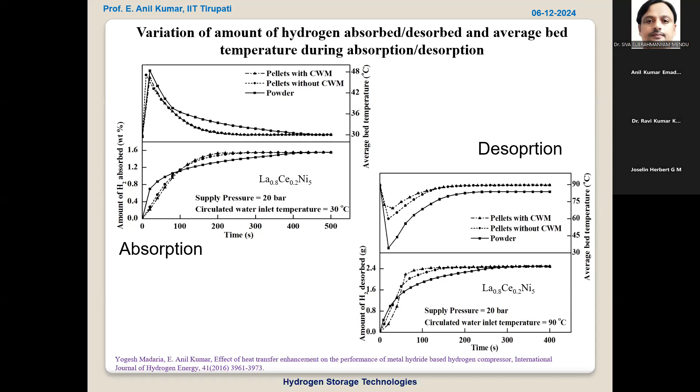The other application is storing heat energy. When you have high temperature heat, you can supply it to the metal hydride bed, so the hydrogen comes and is stored in a cylinder. That means you are storing energy by dissociating a metal hydride into two elements, hydrogen and the metal material.

When you want this heat energy to be retrieved, you can supply hydrogen back to this, so that you can circulate a low temperature fluid at the inlet, and it comes out as a high temperature fluid.

So hydrogen energy storage can be done - thermal energy can be stored by sensible heat storage, latent heat storage, and thermochemical heat storage. The energy storage density increases from sensible to latent heat and to thermochemical energy storage.

The other advantage of thermochemical energy storage is you can store thermal energy for any amount of time without losing its exergy, because once hydrogen starts being absorbed by the metal hydride, it releases the same amount of heat at almost similar temperature. It also has higher volumetric energy density.

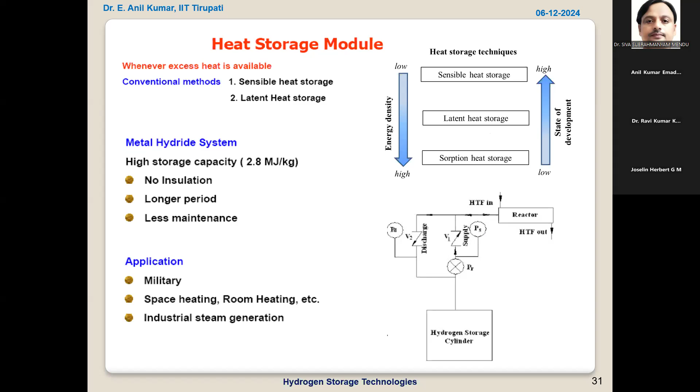So what are the advantages of metal hydrides? These can be operated for a longer duration, a few thousand cycles. Once you build the system, it is operable up to 30 years of life. It has very high energy density and larger temperature ranges.

Temperature range heat sources can be used for energy storage, maybe from room temperature to as high as 550 degrees centigrade. Energy can be stored at different temperatures.

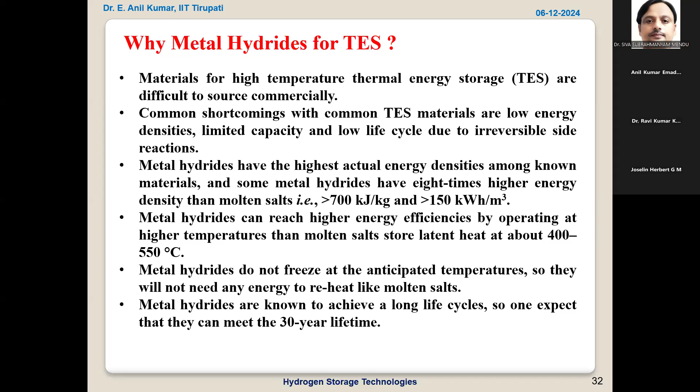So what are the requirements of a metal hydride? It should have faster kinetics, a higher hydrogen absorption desorption rate, and higher heat of reaction, so that you can store more energy for a given material size, and the cost of these materials should be less. It should be cyclically stable and have good hydrogen storage capacity.

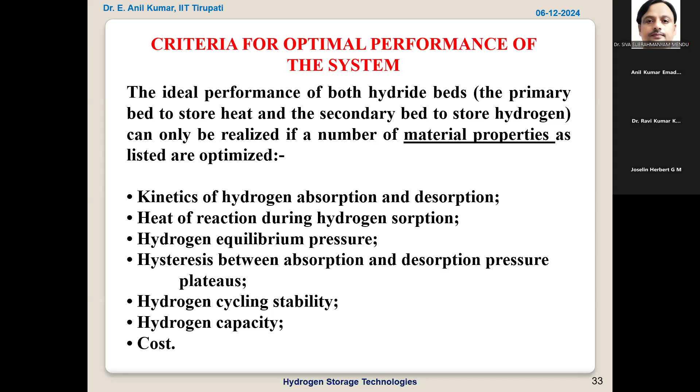Especially for concentrated solar power plants, you require a temperature range of 300 to 500 degrees centigrade. There, magnesium is found to be a good material for storing thermal energy, because magnesium also releases a lot of thermal energy per mole of hydrogen. But the kinetics - the hydrogen absorption desorption rate of pure magnesium - is low.

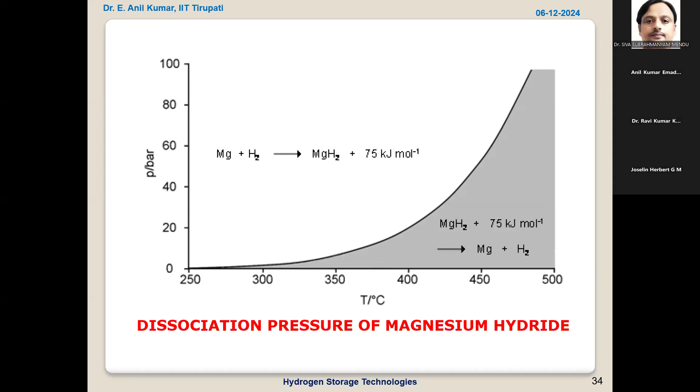So some kind of intermediate composite has to be made. For example, magnesium's properties can be altered by making intermetallics or alloys with nickel or aluminum, or we can mill the magnesium with other metal hydrides to make composites, or add some catalysts to make composites.

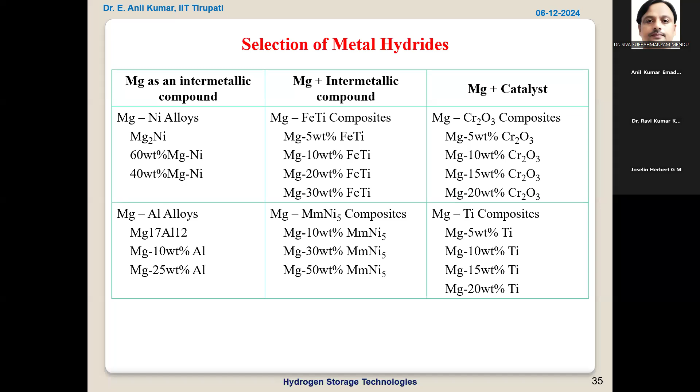It was proven that if the absorption starts at 150 degrees centigrade, the temperature of the metal hydride goes up to nearly 400 to 450 degrees centigrade. That means you can recover the energy at almost 400 degrees centigrade by supplying hydrogen at high pressure. So not only is energy storage at higher temperatures possible, but it can also be recovered at a higher temperature than what it was stored at.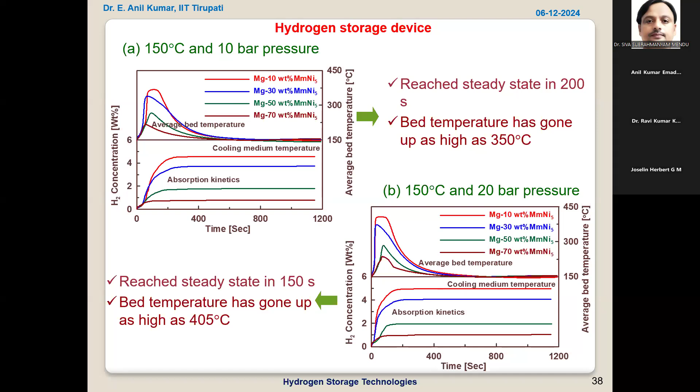This is called heat transformation. Suppose you have a heat source at 300 degrees centigrade - you are storing heat energy at 300 degrees centigrade - you can recover it at much higher, maybe even 450 to 500 degrees centigrade. This is one of the important applications of hydrogen absorption and desorption.

Ultimately, what is important while designing metal hydride beds is, as a mechanical engineer, we look at the design of the beds, where heat and mass transfer plays a very important role. The heat transfer is mainly governed by the effective thermal conductivity of the bed, which is the heat conducted through the solid material in the bed due to gas and solid interaction.

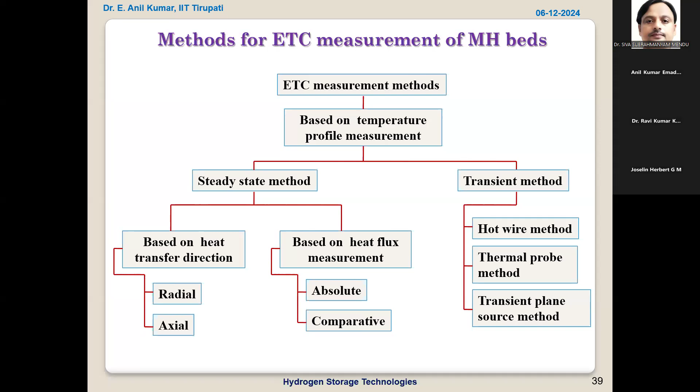There are several techniques to measure the effective thermal conductivity. We have used a steady axial one-dimensional heat transfer technique to quantify the metal hydride bed's thermal conductivity. This thermal conductivity varies with hydrogen concentration, pressure, and temperature of the bed, because as hydrogen goes into the interstitial space, the molecule swells, reducing contact resistance between molecules and thereby increasing conductivity.

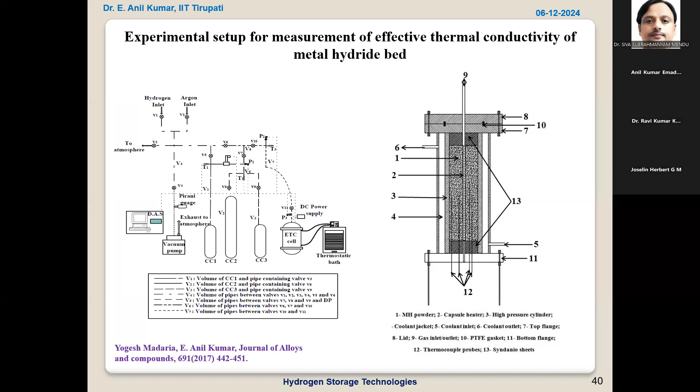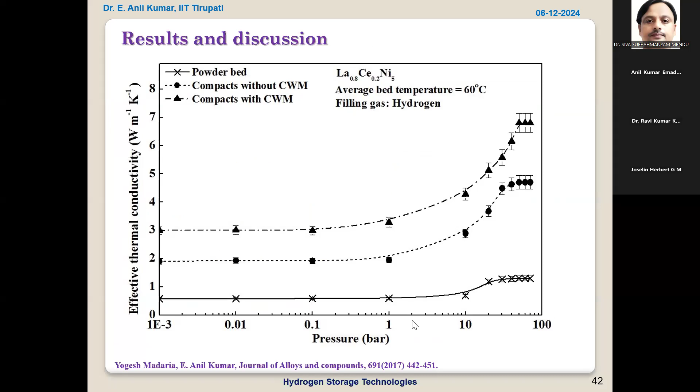So we have done tests on three types of beds: the powder bed and two pellet types. The pelleting has significantly increased the effective thermal conductivity; otherwise the bed has lower thermal conductivity. So not only conductivity, but other parameters also affect the heat and mass transfer characteristics of the bed, which is an important research problem where you need to optimize these characteristics for solid reactive beds.

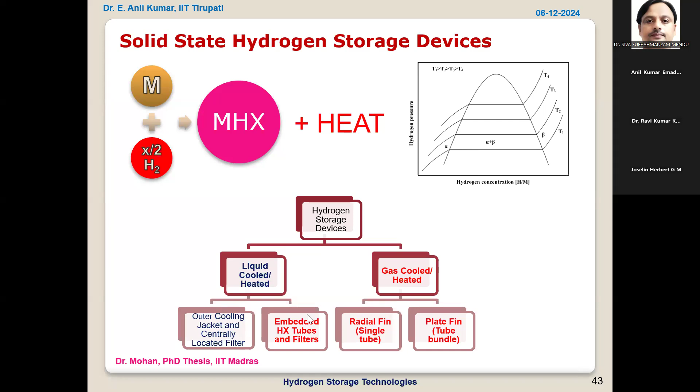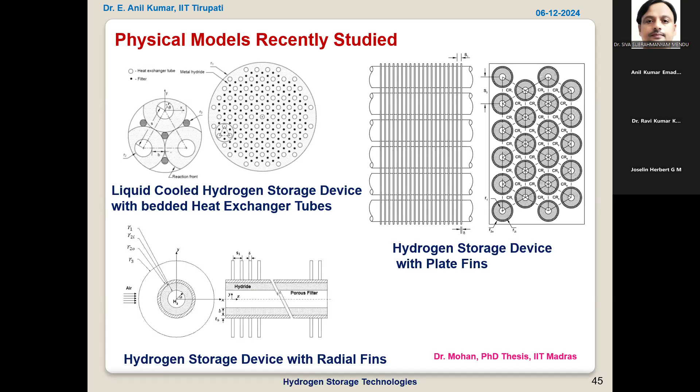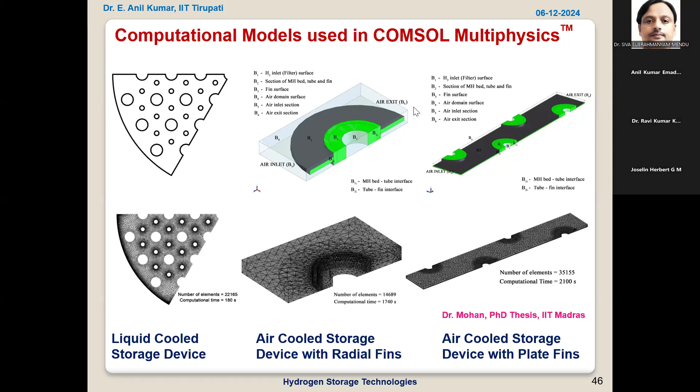These two show the gas cooled or gas heated configurations with different fin designs. These need to be solved to study the variation of hydrogen concentration within the bed and the temperature of the bed as hydrogen is absorbed and desorbed. For that, a unit cell is considered and COMSOL Multiphysics is used, because here we have to solve mass balance, energy balance, and diffusion reaction simultaneously using the COMSOL solver.

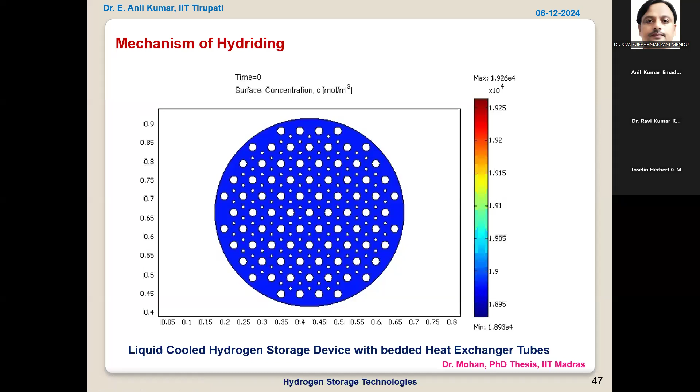Let me see whether this is working. No, sorry, it is not working. So what happens is we can see through the simulations how the temperature and concentration of the bed vary with time. For example, it gets transformed from blue to red as it goes from metal to metal hydride. The challenge is how to arrange this overall configuration, how to reduce the size and weight of the reactor. Optimization needs to be done with respect to these parameters to reduce the size and weight of metal hydride devices.

With this kind of research, material development is very important. We will be able to develop the devices, especially for solid state hydrogen storage.

In a nutshell, we have three options. One is compressed hydrogen, where we need to develop type 4 cylinders and efficient hydrogen compression technologies. The second is liquid storage, where we need technologies to obtain lower temperatures for liquefying hydrogen and storing it efficiently with better insulation without losing much hydrogen due to boil-off losses. The third is solid state hydrogen, developing materials with high gravimetric energy storage density and designing these devices effectively for faster hydrogen absorption and desorption rates.

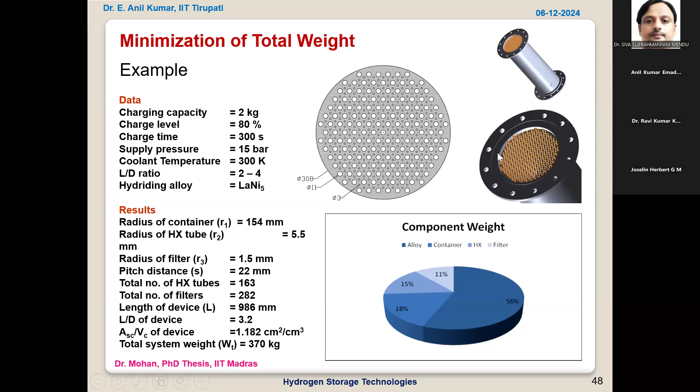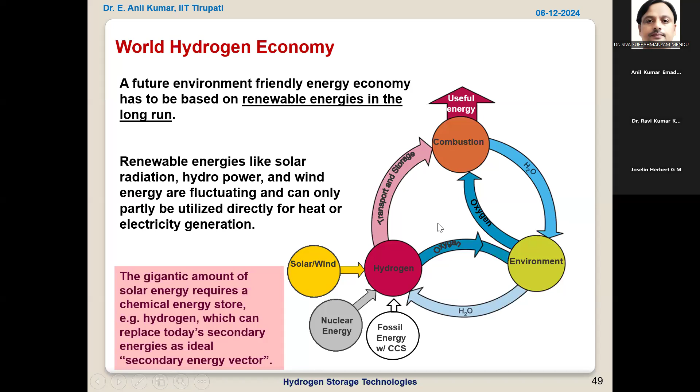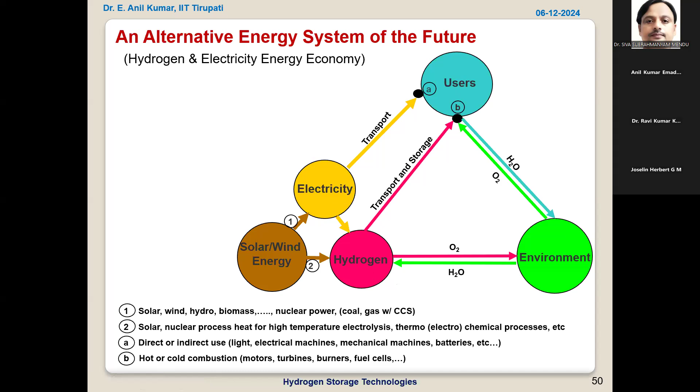I think I'm coming near the end of my talk, as the given time, another 5 to 6 minutes, is left. I'll show a small video on a lighter note for the viewers to have a happy ending, then I'll take some questions based on my talk.